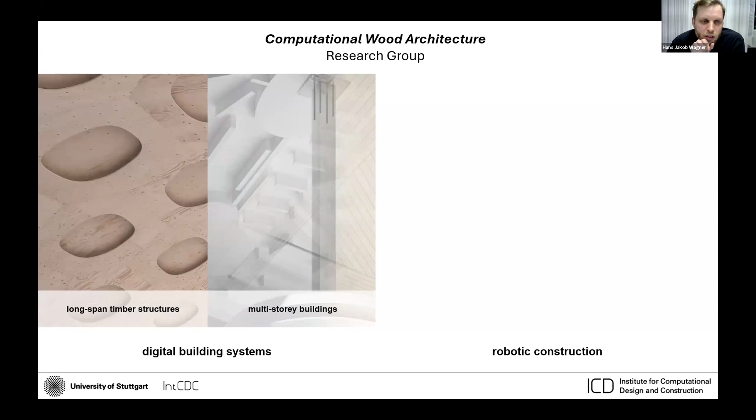So I'll speak about adaptive automation in computational wood architecture. And that is basically one of the core focus topics that we're trying to address in my research group, aptly called Computational Wood Architecture, with a small wink at Oliver. And what we focus on is the development and the conception of digital building systems. And at the same time, we try to integrate that with robotic construction processes. On the digital building system side, we've been focusing mostly on long-span timber structures, but since more than 5 years, we've been deeply invested in multi-story building systems. And on the robotic fabrication side, we've been doing mostly robotic prefabrication.

But since recently, we also have a big team together with our partner institutes here at the University of Stuttgart, where we develop novel robotic on-site construction processes. We do that all under the notion of co-design, where we try to integratively develop design and engineering methods together with fabrication and construction processes, and develop new building and material systems.

A fairly good example for that is the Buga Wood Pavilion that is depicted in these bubbles here, where we came up with a new building system. Actually, that was mostly still when Oliver was here, and then we developed a new fabrication process together with a new fabrication platform in that case. And I'll show quickly how that looked.

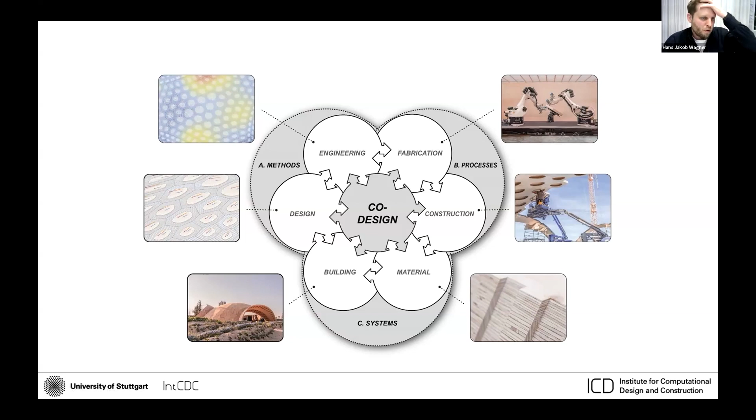Basically, we had a robotic fabrication cell that we transported to our partner at Müller-Blaustein Construction. And these two robots were basically taking directly the data from a computational design model to assemble 376 unique cassette building assemblies. And after fabricating those, this is the final result.

We were able to assemble them on site with basically zero tolerance, speaking to the high accuracy that we can achieve with robotic fabrication. And even though each of those building components has a unique shape, the robotic fabrication was fully automated.

And this is basically the starting point of what I wanted to present today, because these kinds of projects, the segmented timber shells, were really a great vehicle to communicate what is possible and what we can achieve, what kind of novel forms and novel design opportunities we can find in the combination of novel technologies of computational design coupled with robotic fabrication or digital fabrication for that matter.

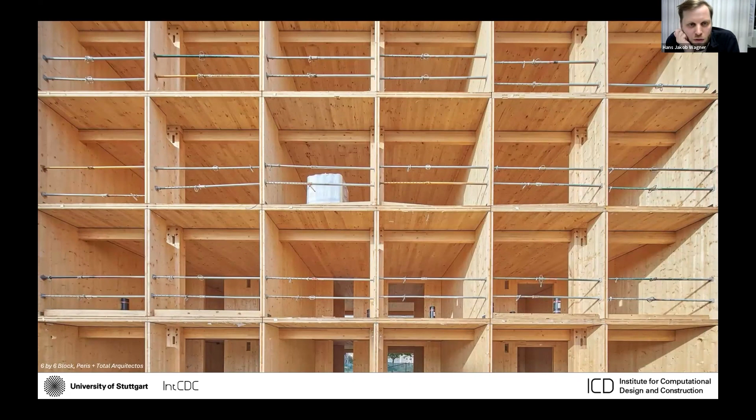But of course, we all know that not all buildings must be segmented timber shells. Some buildings are also multi-story structures. And after the Buga shell, we basically asked ourselves, okay, how can we apply those technologies and this fundamental method of co-design, of integrative development, to multi-story structures, and how can we overcome a certain kind of limitation that has been visible in construction since at least 100 years.

We've seen the systematic, functional and standardized prefabricated buildings from the 20th century, and our hypothesis or our research challenge is that even though today we speak about standardized and prefabricated construction with completely new terminology, we need to be very careful not to fall into the same kind of traps that have become apparent with the standardized systems of the 20th century.

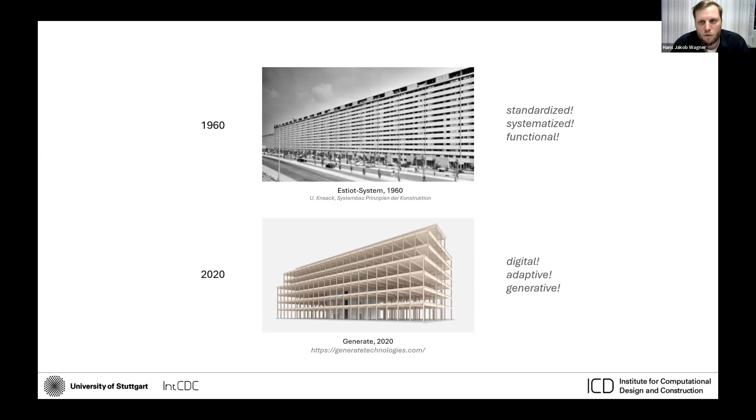I think Oliver's company is a really nice example of trying to overcome those kinds of constraints that lead to a fairly strict, non-adaptive and rigid kind of architecture. And in research, we're trying to power this movement of overcoming these restrictions. What that means is that we want to achieve in timber construction a similar kind of spatial experience that is possible with concrete slabs. Specifically, I'm talking about slabs.

For that, we need, of course, to transfer a unidirectional material that is timber, with its predominant fiber directionality and anisotropic material makeup. We need to achieve not only a bidirectional plate and slab structure, but a truly multidirectional slab structure. And that's really the challenge that we're trying to solve. It's a challenge not only of material buildup and cross-section, it's of course also a challenge of joints and connections.

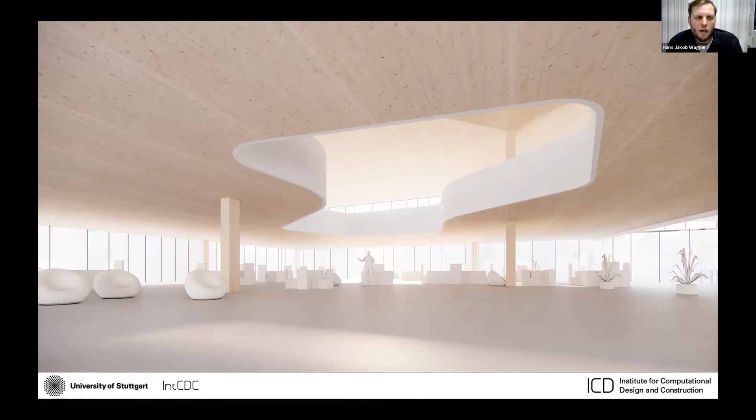But the overall goal is to achieve building spaces like you see here now on the screen. I guess far less exciting and crazy than some of the other projects that we're doing in ICD, but truly meaningful to me, because I really believe that if we enable in timber construction this kind of freedom of less rigid ordering systems, then they can also achieve a much higher market share.

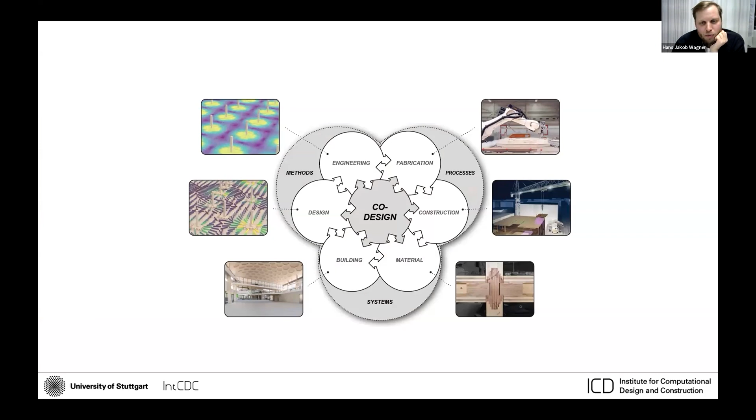We applied the same method as I mentioned before, called co-design, and we basically developed a fundamentally new building system from scratch. Actually, Oliver still had his fingers in that project as well. Gonna skip a slide quickly. So early 2018, 2017, I guess, there was already the first research project application with some ideas on how multi-story timber structures could evolve and how they could become more adaptive, more performative.

In 2019, I started working on that with the first prototypes, and since then we've been on a fairly amazing journey. We've worked together with fantastic engineers at the MPA here in Stuttgart, with fantastic building physicists, acoustic engineers, and of course our colleagues at the Institute for Structural Engineering at the ITKE with Professor Knippers.

And we've built prototypes together with Züblin, which is a large construction company here in Germany, and tested our robotic fabrication, and also did some first tests on the robotic on-site construction, where I can only show some very early hints on how that's gonna look.

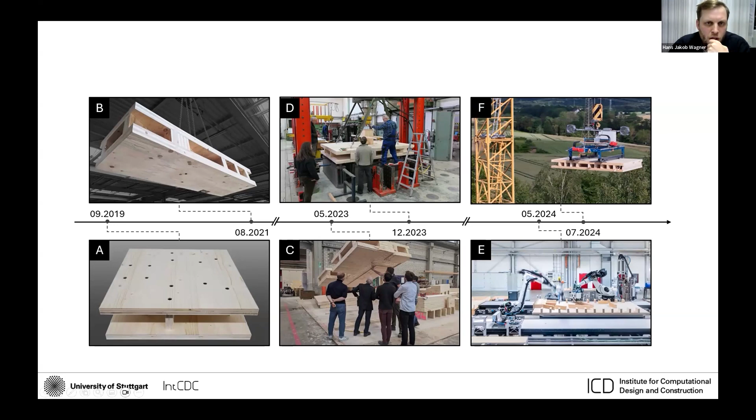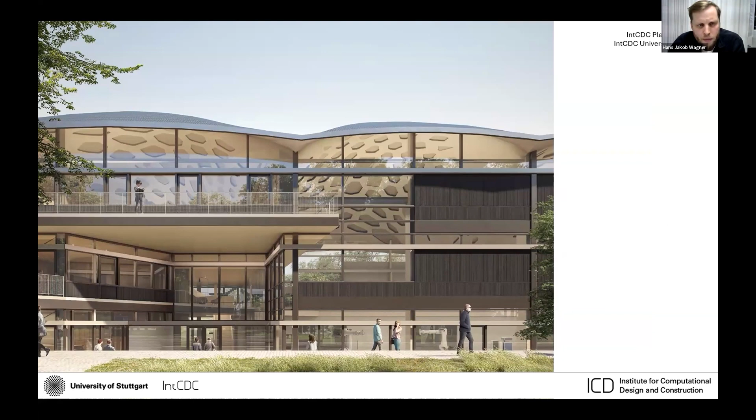And at the same time, we implemented this new system into the design of a new building that we're currently planning, which is the LCRL, or the IntCDC building. The IntCDC is the excellence cluster here at the University of Stuttgart, basically a large research center. And the building that we're envisioning will become the laboratory for that cluster.

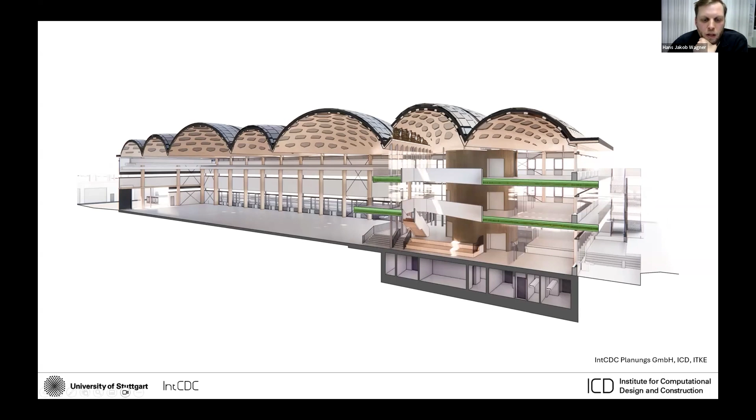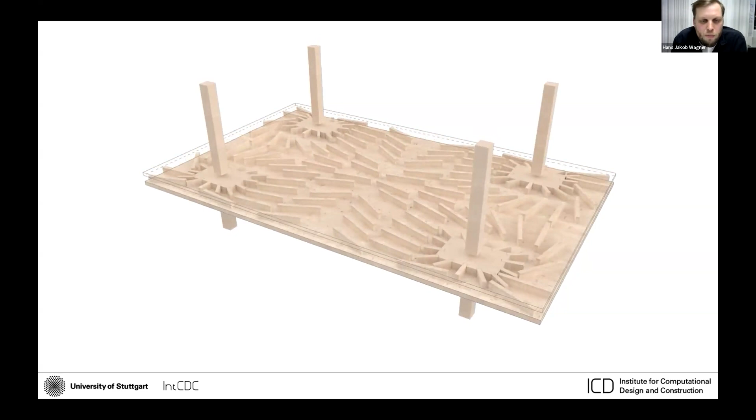And our multi-story timber slab structures are located here in the office area of that building. And I will quickly introduce you now to the concept of that building system. Basically, we start with a CLT slab, but we make it hollow. We split it into two plates, have a hollow core, and we couple that system with shear webs, and the system is point supported, so that those shear webs actually necessarily need to follow the force flow in the structure, and around the column we reinforce the slab with solid blocks.

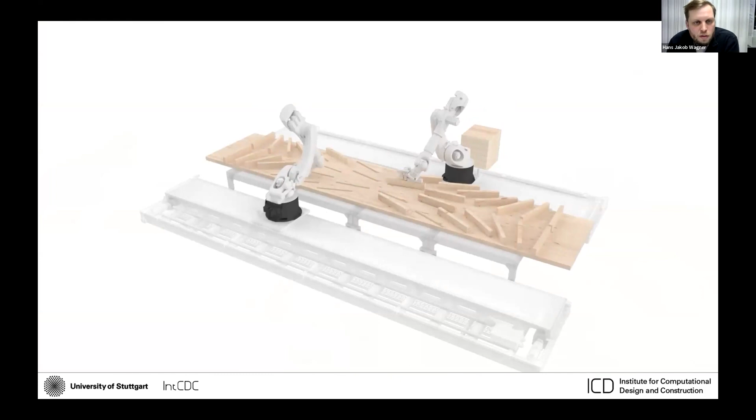We split the slab in segments that are fully robotically fabricated. We use a glued manufacturing process, so basically the elements are glued onto the bottom plate first, and then the top plate is glued onto those inner beams. Of course, the size of the segments needs to follow the fabrication space of the robotic fabrication setup, and then we have all those segments joined together to form a quasi-monolithic slab structure on site.

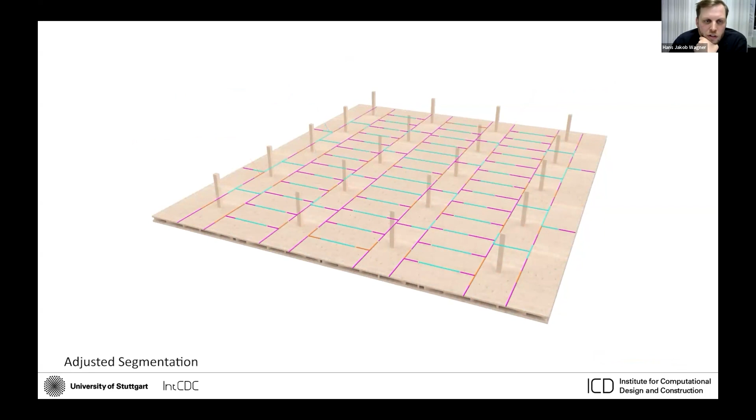Of course, there's different forces in different regions that not necessarily follow the same segmentation pattern that fits the structural logic, the fabrication logic. So we have actually a number of different kinds of joints that follow a different performance spectrum implemented in those structures. And really the core aim is that we allow complete flexibility to the architectural designer to put columns wherever they want in the building, and to then have the building not be dictated by the transportation limitations of certain segments and by the transportation logics of modular construction, but really the fabrication domain and the fabrication limitation at some point just disappears in a solid flat slab, independent of where the columns actually are positioned.

At the same time, that allows us to build highly adaptive buildings, which is specifically important in inner urban developments, where the sites sometimes have their own quirks and boundary constraints, and at the same time have also internal constraints that come from mixed use development. So maybe there should be a supermarket on the ground floors, then some offices in the first upper floors, and then some residential units on the top floor. Each of those systems have different requirements on column positioning and grids.

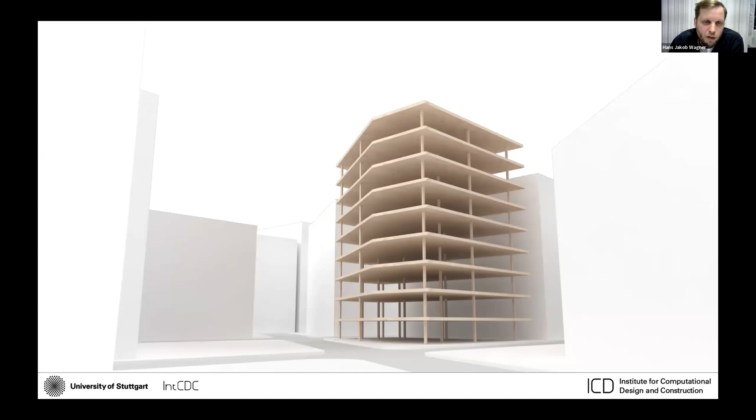So actually those buildings usually, if you build them from concrete, are done with fairly large spans, and of course are point supported, so that they can also be reused very adaptively. And we try to achieve the same thing with timber, and importantly without beams underneath, so that we can actually achieve very compact buildings, and we don't lose very valuable space inside inner urban developments. The building that we designed for the site here in Stuttgart tries to showcase all of those qualities.

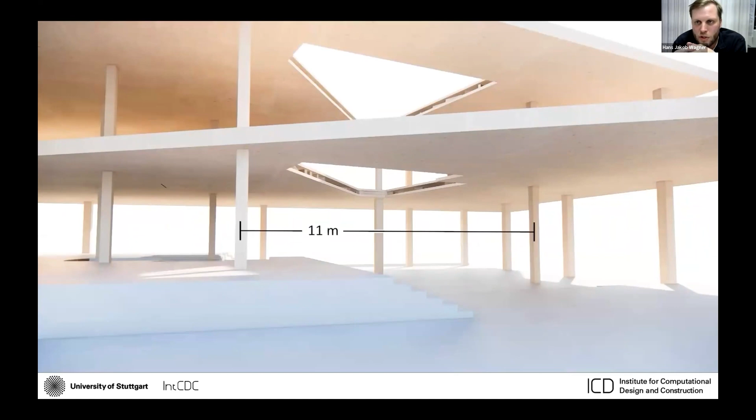So it has 11-meter spans. It has irregular column positions and a cutout for a central stair that connects together all of the office area. At the same time, we have a scissor movement of the two slabs to really connect the office space with the hall and create this bidirectional relationship between the researchers that are working on the computer and the researchers that are working in the hall with the robot.

Yeah, that's kind of where we are. We hope to finish that building fairly soon. We're currently waiting for the final signatures of the client. You can imagine it's a big project and quite exciting to us to start the fabrication together with Züblin Timber. I'm actually coming to the end of the presentation.

I just wanted to give a very short outlook to some new projects that are starting in parallel to the project that we just saw, which is a new slab system which completely breaks free from the logic of prefabricated CLT plates, but much rather we want to build here our segments starting from the lamella itself, following some of the insights that we gained with the hollow building system that I just showed. And this project is interesting, and I mention it also specifically because it's actually a transfer project funded by the European Innovation Council.

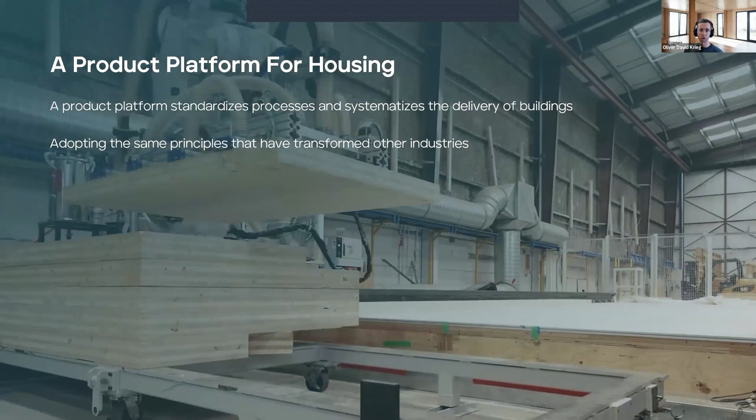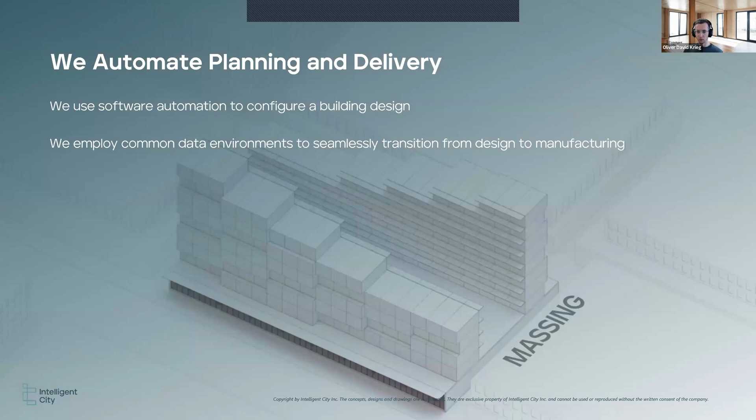That means we standardize processes, we systematize the delivery of buildings, but we adopt principles of mass customization through the power of technology by defining design ranges or design spaces of our building systems, and ultimately encoding them in our design systems, which we then can automate using software and basically connect the complete supply chain or value chain of building buildings from design to manufacturing and into construction.

So the idea of a product platform is obviously not a very new one, also not in construction. But maybe to make a point here as to why it may be so difficult to implement. A product platform is a set of common repeatable elements that can be shared across a range of related products. A really good example is the kitchen. A kitchen is actually an industry-wide product platform. Every kitchen supplier has agreed to adhere to certain constraints so that they're interchangeable.

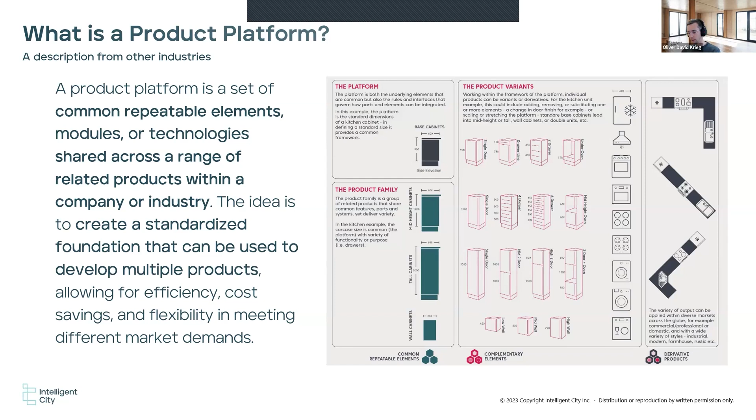And so basically everything is based on certain base cabinets and variations thereof. And there are standardized interfaces so that you can buy different fridges and stoves that can interface with your kitchen. So ultimately, each kitchen can be different, even though it is sharing common parts. Other great examples of product platforms are cars, obviously.

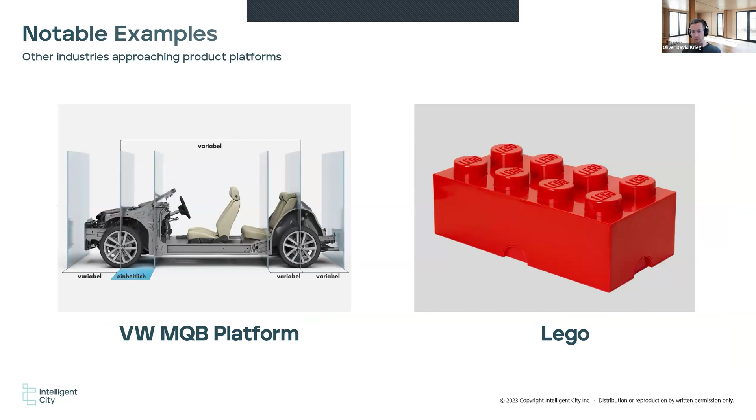Lego often comes up. I really like the tension when we compare with the car industry because there are so many good lessons we can learn from it, and yet there are so many things that are not applicable to construction. The number one thing being you cannot do this. You cannot vary the length and the width of your car because your garage is wider or longer and you want to utilize the space that you have in your garage, right?

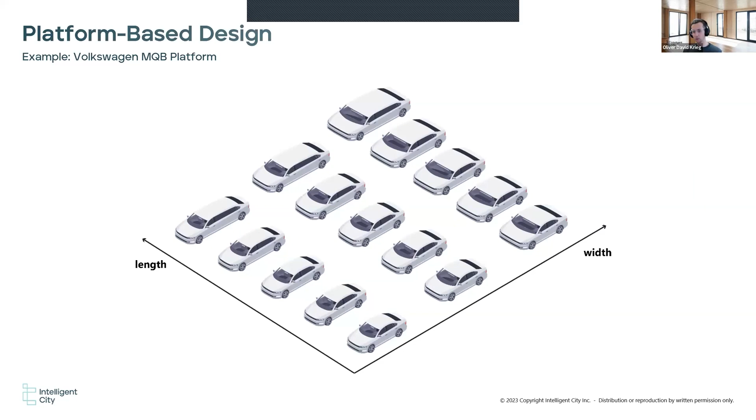That sounds maybe familiar for those of you who work in real estate development. If you have a lot that has a certain size, the building has to fit in the lot. And so what we encounter when we look at multifamily, especially multifamily construction, is that the configuration of the building is one aspect, but the other aspect is also what actually fits on the site. And so we have to combine the idea of a product platform, the idea of having core elements, complementary elements, with the idea of geometric adaptation or geometric customization so that the building fits onto the site.

So what we do at Intelligent City is we like to design the entire building, deliver the entire building as architects, in the future also including the engineering, although some of that is already in-house. We manufacture and are specifically focused on the core elements, which is the envelope and the structure of the building.

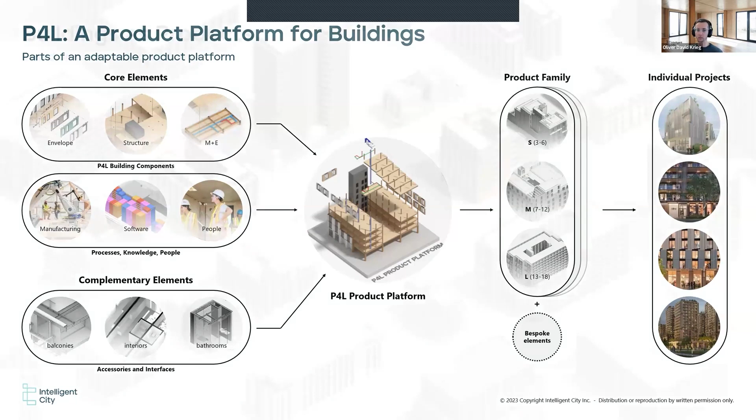And then we interface with complementary elements, and we are trying to build an ecosystem here with prefab bathrooms, interiors, balconies, and other parts that attach to the building, so that we end up with a product family that we usually divide up into low-rise, mid-rise, and high-rise construction. And from that, we can then deliver individual projects that can differ significantly in their shape, in their design, but they're still based on the same platform.

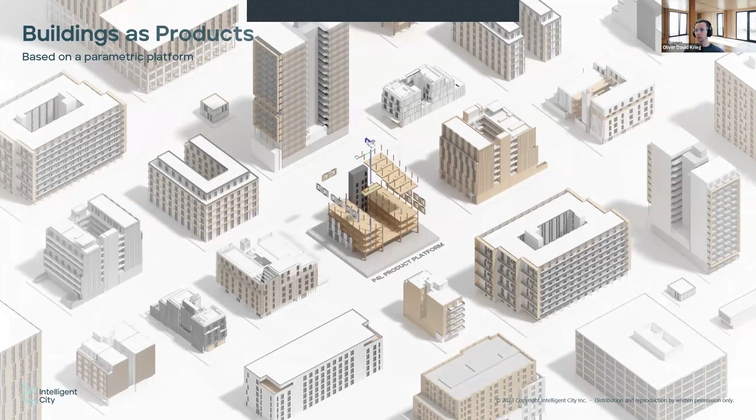So that's the ultimate goal of industrializing construction. And I'm sure we're not the only ones working on that. You develop a variable, configurable product platform from which you could deploy many different buildings. So ultimately, the design process of a building becomes a configuration process. You go from designing a project to configuring a product.

So you ultimately start with the massing, you put in the apartments, you have a few choices in terms of performance. There may be some choices for the structure, but then ultimately it's really down to facade. You can see windows, cladding, materials and colors, accessories, and the interiors. So the combination of the very first part and the last part is really what defines the aesthetic and the branding of a building. And these are the aspects that have to be really variable.

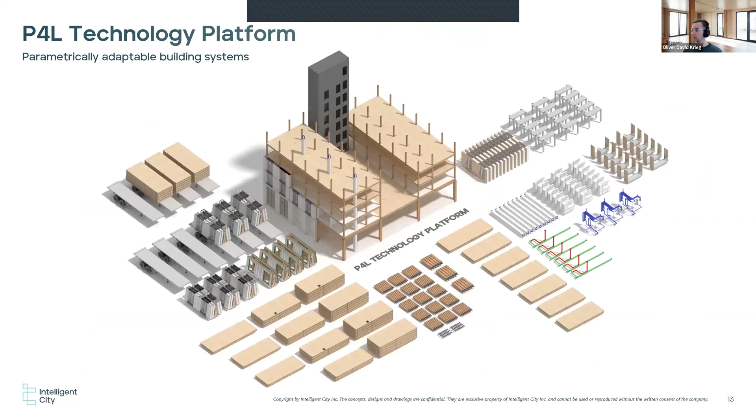And so for the last 6-7 years, we developed the technology suite in a way that would allow us eventually to design and deliver these buildings. It can be very easily divided up into 3 aspects that I want to talk about a little bit more in the next 10 minutes. The one part is the building systems essentially. So really the floors, the superstructure, including the columns, the envelope system, both of them mass timber based, both of them made for high rise, both of them certified for prefab and enclosed spaces.

We do have a portion of MEP integrated into those systems, but what isn't integrated is still planned within the system. So it's controlled by us. To deliver these, we had to develop manufacturing technologies, and we had to equip our own factory with tools that allow us to manufacture these components with a certain level of variability. So very similar to what Jakob just showed, the design to manufacturing process: what kind of components can you make, what are your limitations in terms of design space coming out of the machines that you're using, but also, of course, transport and cost and so on.

And ultimately, this is all controlled by a software stack that is really just plugins, tools that we develop ourselves in Rhino and in Revit that allow us to design a building, basically divided up also into 3 aspects here: Delta Studio to design the building, Delta Systems that populates the building parts into the building, and ultimately defines the BIM model if you want. It's a very enriched model.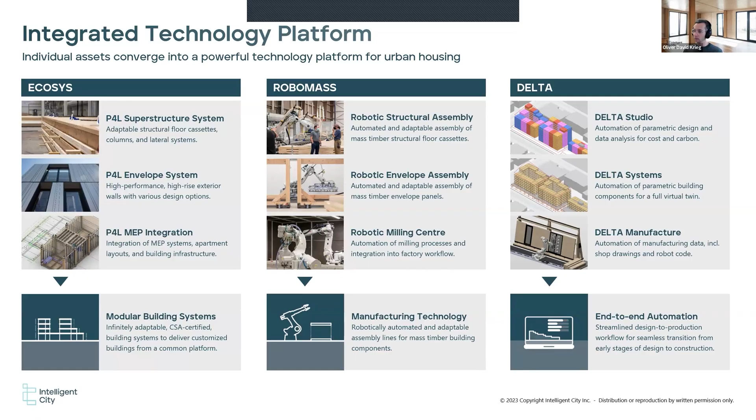In terms of building systems, it was really clear from the beginning that what is missing in this industry is an ecosystem of prefabricated components. Again, if you want to compare it to the car industry, there are many companies that prefab lights, seats, steering wheels, and so on. Same in other industries. You have suppliers and you have the OEMs.

What's missing in our industry is a big supply chain for mass timber prefabricated components. And so we decided, at least for those aspects, we have to develop our own systems and we have to ultimately manufacture them ourselves. Basically, if you look at our buildings, they are made from floor cassettes, columns, and envelope panels.

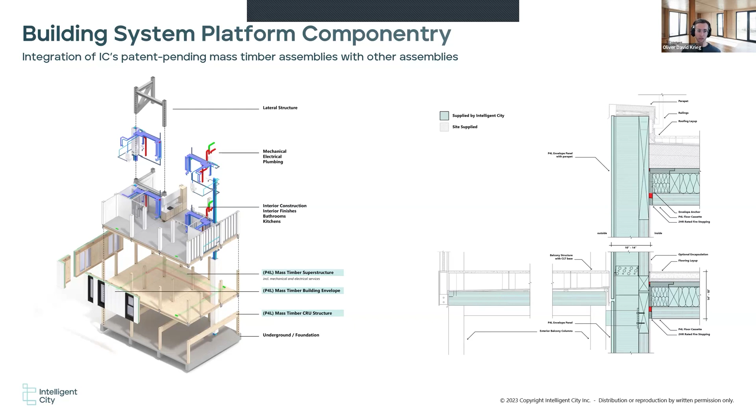Very interestingly, maybe this one first here, our floor cassettes are indeed cassettes. They are hollow core, two-way spanning stressed skin floor cassettes. Very similar to what Jakob just showed. They have an interstitial space where ribs transfer the shear forces, and they allow us to construct buildings without supporting beams. At the same time, they also allow us to implement services. I'll show that in a second.

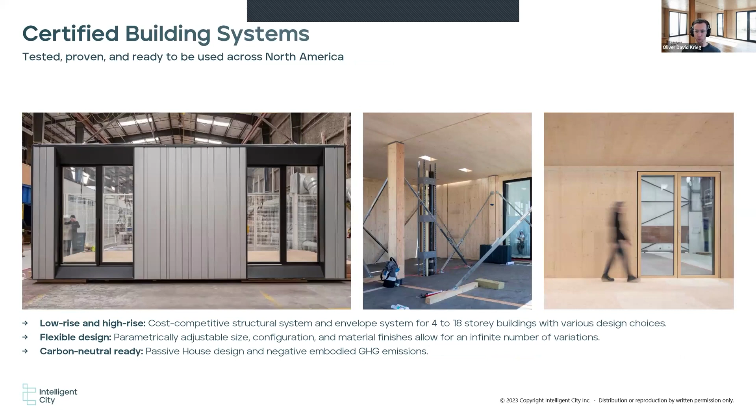The other part is a mass timber curtain wall envelope system that is applicable for high rise. So as far as we know, it's the first one of its kind. It is passive house certified, or can be passive house certified. It passed certification tests. And so that is sort of the first step.

How do you lay out the structure of the building? It comes with a lot of constraints. That is really clear, especially in housing. You really overlay the structure with the apartment layout. So the apartments also become part of our library because they really define how we subdivide the building into grids.

You really start with the layout, core placement, and follow, I would say, relatively rigorous rules, although in mass timber construction, generally, these rules are a bit more rigorous than in concrete, where you have pretty much complete freedom. And that is also something that our industry is learning, that if you work with mass timber, if you work with systems built, you are a little bit more constrained in your design freedom. You cannot go completely crazy with your corridors and apartment layouts.

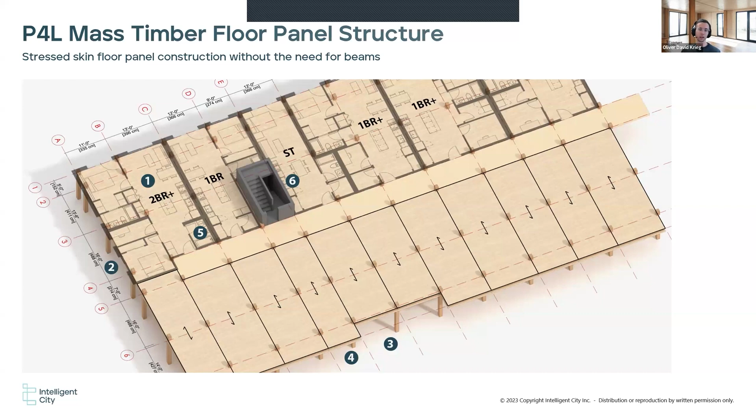But in turn, you get a system that is already resolved. In turn, you get a de-risked and accelerated project. So the value creation here is that you know what you're getting as a developer, and you know what it's going to cost, and it's not going to be an explorative process as traditional construction may be.

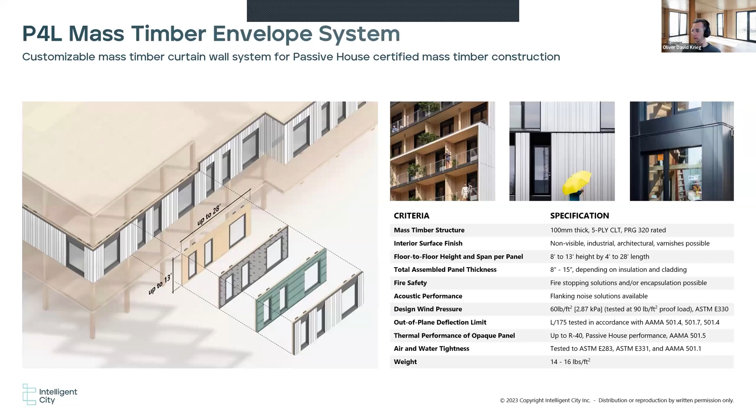Similarly, for the envelope system, it wraps around the building. It encounters all sorts of edge cases, such as corners, setbacks, balconies, terraces, parapets, and a combination of all of them. Again, it is a mass timber curtain wall system, so it's hanging from the structure, and it is approved for up to 18 stories in the construction.

And this is a bit of a, on the one hand, you get to understand how the system works. On the other hand, this is also the logic of our algorithms in the background, how they subdivide the envelope to enable us to put these panels in place. They're up to 2 grid spaces in size, so up to 28 feet. At that point, they do weigh around 5,000 pounds.

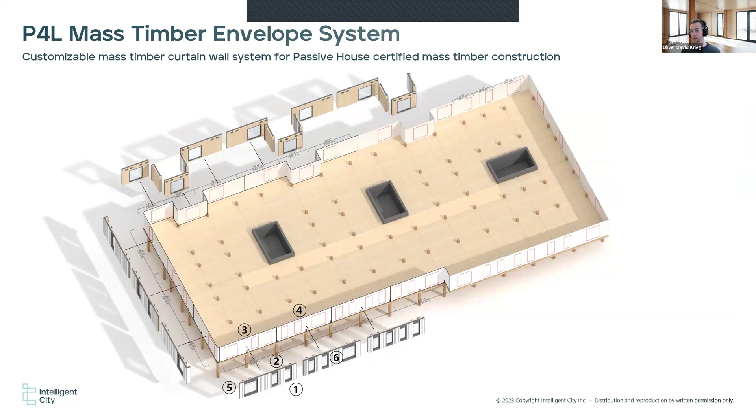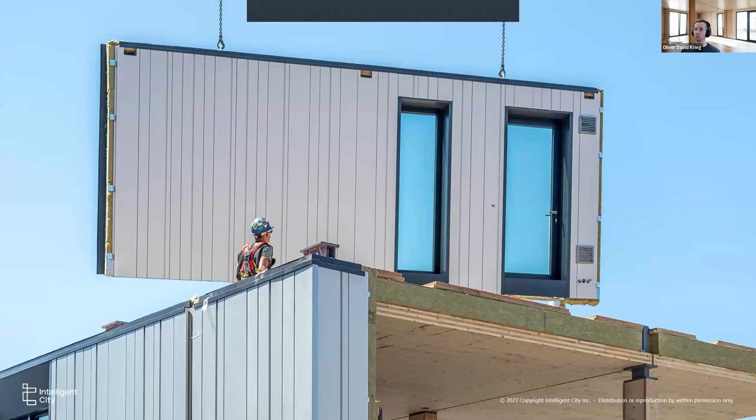So this has some significant implications also on on-site construction, what kind of crane you need to choose, and so on. We did test them twice actually already for passive house and seismic and all of these things, as we did test the floor cassettes for fire safety and structure and diaphragm performance.

So a bit of a time frame here: between 2019 and 2021 was early development. That's where we raised a seed round. In 2022, we got a factory space and put in some of our robot cells that we developed to kind of lay out the factory and the workflow of the factory to produce floor cassettes and envelope panels.

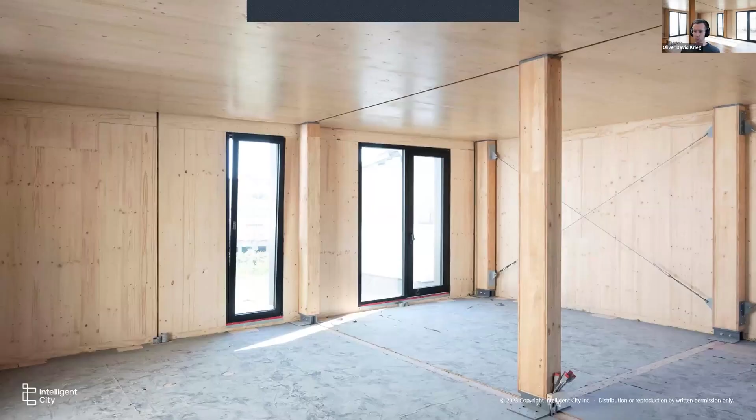And then throughout 2022, 2023, while we commissioned that and experimented with that, we got into our first project. This is a small 25 by 25 foot mock-up that we basically used as sort of the last chance to test everything, how everything comes together.

And from there, we learned obviously a ton again of how these components come together on site. To give you some metrics, the goal is at least 7 panels produced per week. That's 7 envelope panels and 7 floor cassettes. And the goal is also to install them every half hour to an hour, so that in a medium-sized building, you can install a floor in 1 or 2 days. And we've actually hit that recently in our current project that I'll show some pictures and videos of later.

It's really down to the really small details of how these things come together on site, especially when you're up in the air on the 6th floor with a huge crane and it's a bit windy and rainy. That's when you can truly test if your ideas have worked.

The manufacturing concept here is we automate those things that are difficult to handle as manual labor, but also those things that are repetitive, that need precision, and that need variation. So variability between parts is fine as long as people understand what to do, or as long as the robot knows what to do. So if every part that you encounter is different, but the manufacturing logic is the same, that's when customization becomes useful. And so we decided to implement robotics to assemble the components. We pick and place, we glue and screw. We also have our own robotic milling center.

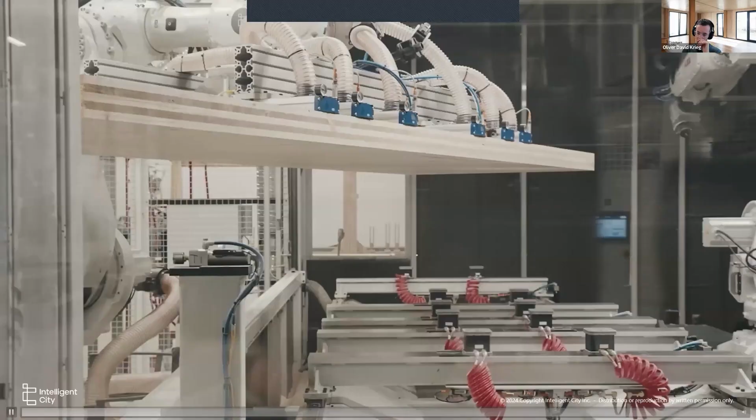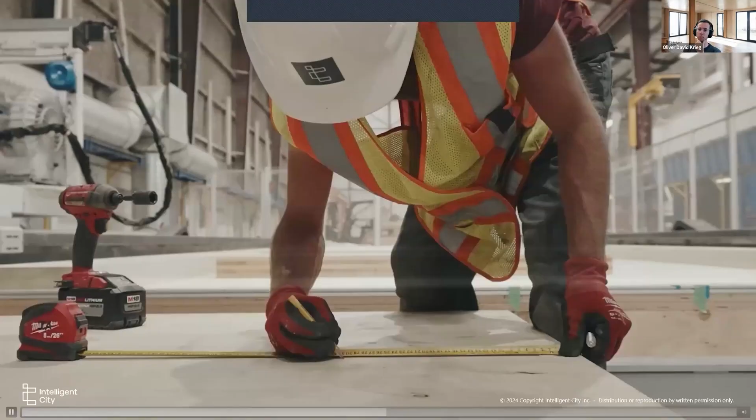Let me see if I have some images here. So that has a little more automation than your traditional milling center, so that it's loading and unloading materials by itself. So we can ultimately implement it with AMRs, just as the one you saw in Jakob's presentation, so that the materials can be brought around the factory automatically.

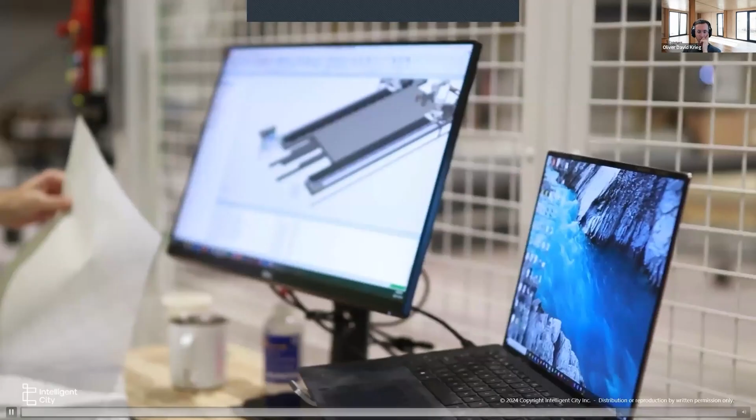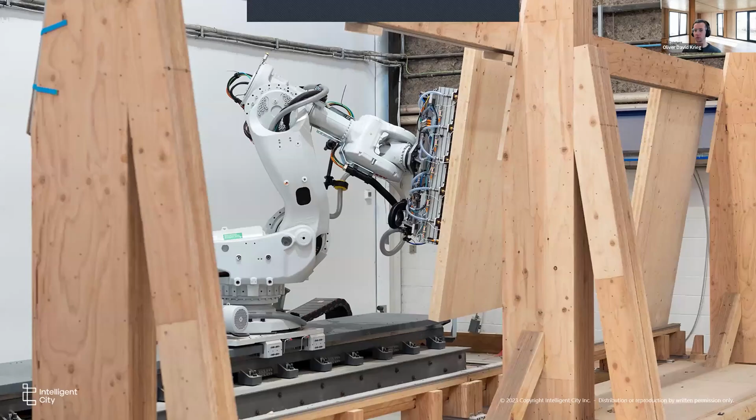And then the same thing with the floor cassette assembly. I'm not really showing a lot here because it's a very complex and sensitive process. But as you have seen before in the pictures, the floor cassettes glue together from various smaller components so that they form one consistent panel. Now that's all controlled through a software workflow.

Okay, I'm gonna finish up here in a second. So as I mentioned before, we structure it in 3 phases. You go from the design intent to a BIM manufacturing model and ultimately to manufacturing data. I think this is probably the most important slide for this kind of idea.

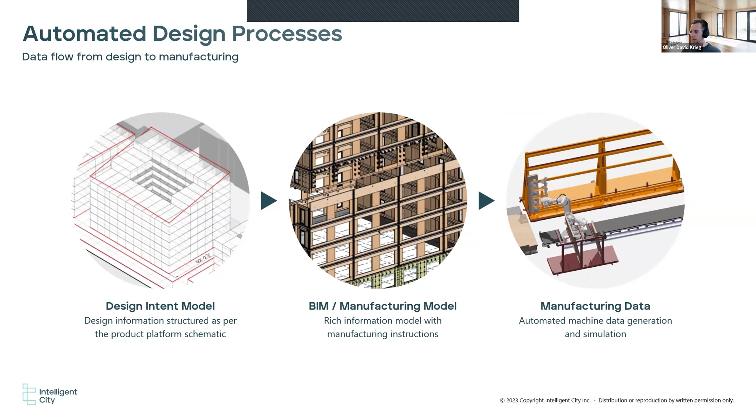This is enabled by having a common data environment, so that all the objects that are generated in the first picture can be referenced to generate the parts that you see in the second picture, and those again can be referenced and manually edited or automated, depending on your workflow, to then be referenced again for the manufacturing information. And that allows us to basically create fabrication drawings, robot code, and so on, such as for the assembly of our floor cassettes, as shown here in the simulation, and ultimately for other parts.

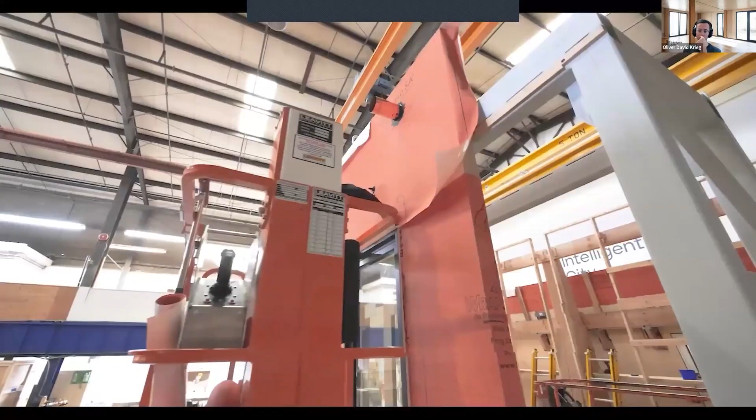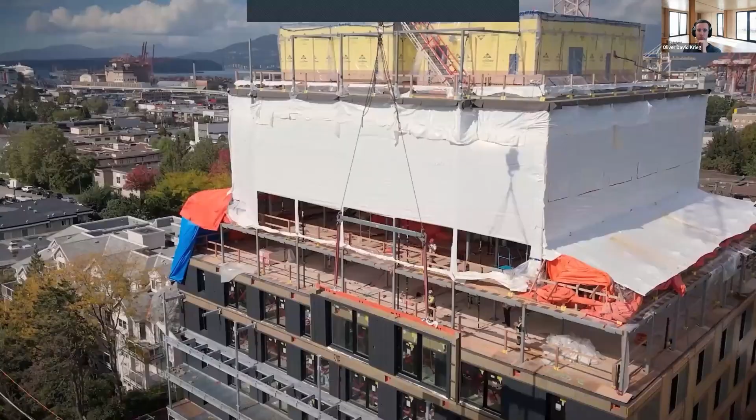So we can see here we assemble the envelope panel with a robot, or at least the timber portion. A lot is still manual, of course, especially membraning and cladding install and so on. Although this is all up for grabs, we want to automate a lot more in the future. What you've seen here is a few months old.

So we are just finishing up our first project. It is a bit more custom than what we would have liked, but it is actually a really beautiful cladding design with this sort of weave. You'll see a lot more of that around the building once the balconies and the screens are also completed. This is a 50-unit affordable housing project for BC Indigenous Housing Society here in Vancouver, BC.

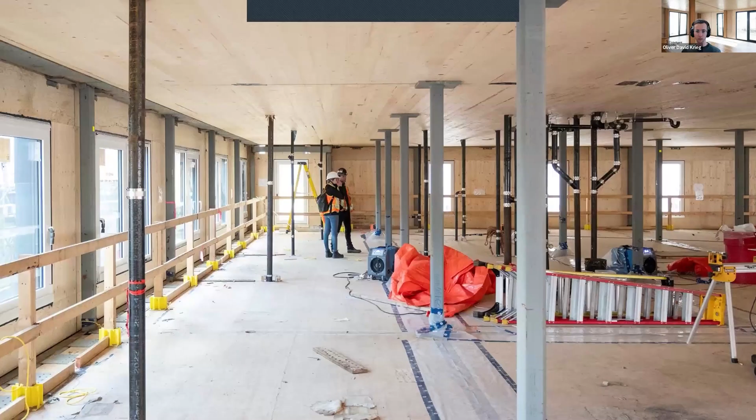And it has a different structural system. We unfortunately came too late for this project, but we were able to provide the envelope, which really kickstarted our own commercialized production process in our factory. And as we are finishing this project, we're now preparing the one in the middle here. It's a 9-story building that's completely Intelligent City system that's going to go into production in December, and you will see it on site probably in April or May next year. So that's our second step.

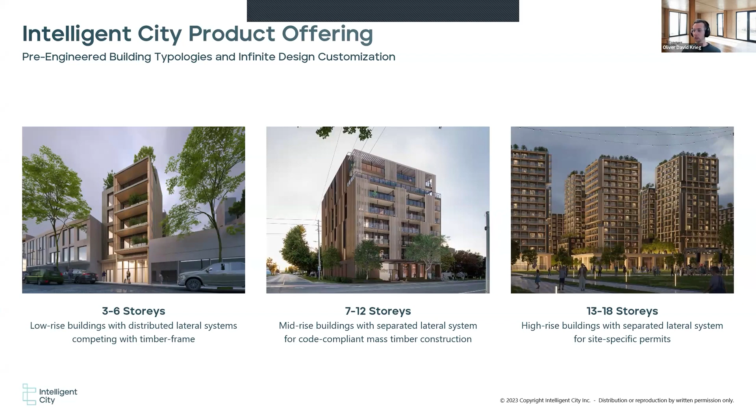And with that, we are looking to expand. We actually see a lot of demand for repetitive housing that is really sort of the ideal candidate, especially in the 7 to 12-story range in Toronto and generally the East Coast. And so we are currently planning to expand. Our current factory is really a very small plant. You would be surprised. It's just 15,000 square feet.

It has a certain output capacity. We can do about 200 apartments a year. But what we're looking for is basically a sort of 5-fold increase, a 75 to 100,000 square foot facility space, in which we then can produce between 1,000 and 1,500 apartments a year, both in BC and in Ontario, and then also in the US, depending on the demand.

The really amazing thing is that mass timber really started a sort of alignment process in the building codes because of the adoption of the international building codes. And so there are a lot of similarities between building codes throughout North America, with only minor differences that don't really affect our components as much as they simply affect the design of buildings and the setbacks and the apartment layouts.

So that's where we are. I'll leave it at that. There's probably a lot more to discuss, but that gives you an overview of all the technologies that we have implemented so far and where we are as a company.

Okay, thanks a lot also, Oliver. That was a really fantastic presentation, and it's amazing to see these things going out into the wild successfully. And yeah, we hope that we are also sending some across the border.

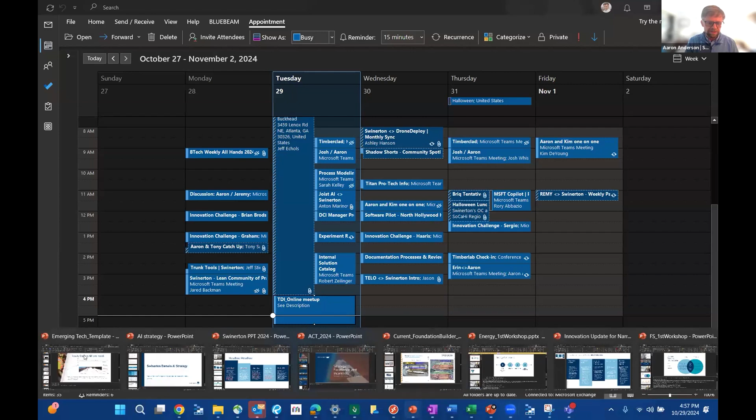So don't look at my calendar. No, I'm just kidding. You can see my calendar, but it's too full.

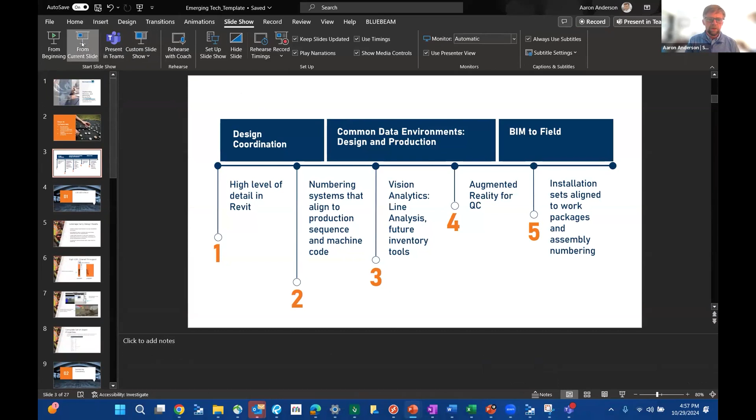So what I really want to talk about today is, I'll hit on a few key things here, but really for us, it's about finding what the most important parts are in the process to be able to layer in automation, to layer in robotics. And what we found is that waiting for detail is really the wrong answer. We try to get as much detail as early as possible into the process, and encourage people to get pencils down as fast as possible.

So we create a really high level of detail in Revit. We get to 450 LOD in Revit. We use numbering systems that make sense to folks, so we start numbering assemblies early. We get as much BIM information into those individual objects as possible, so that what we're doing is creating information that can be used throughout the process.

In our actual production facilities, some of the things we've really been focusing on are ways to use computer vision analytics. Instead of using them in the robotics, we're using them to monitor the way that humans are interacting with our CNC machines. And we've also been verticalizing in that space. So we now have traditional CLT manufacturing and traditional glulam manufacturing. Having access to those facilities is giving us supply chain access and the opportunity to innovate in the supply chain.

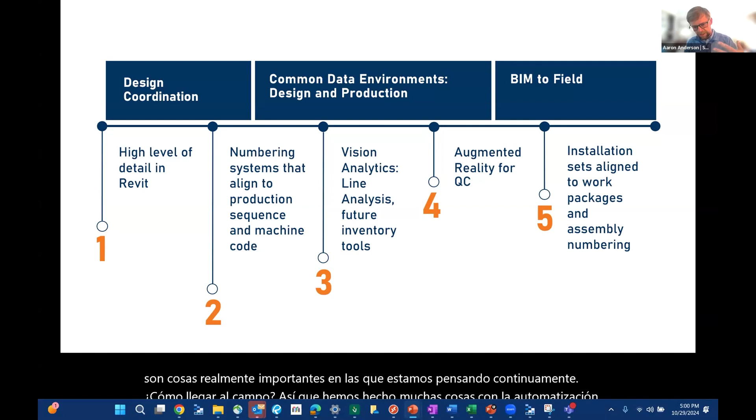So these work packages that we develop, this level of detail, all those things are things that are really important that we're continually thinking about how to get to the field. So we've done a lot of stuff with automating drawing production so that those things always have the same kinds of standards in them. They always have the information that's needed, and then getting the feedback from the field.

So, early design assets with information really helps us to apply analytics early, extract information at different stages of the process, and then also more rapidly iterate for cost. When we get these Revit models connected to cost and schedule, we can rapidly iterate and see what the effect is going to be on the schedule. We never get more time and we never get more money when we get these prices up front.

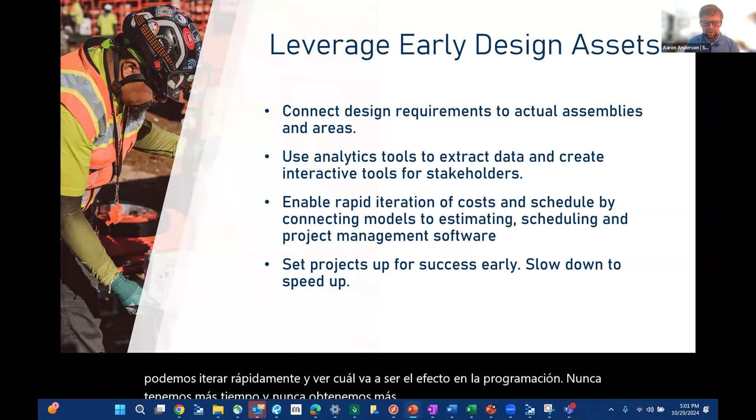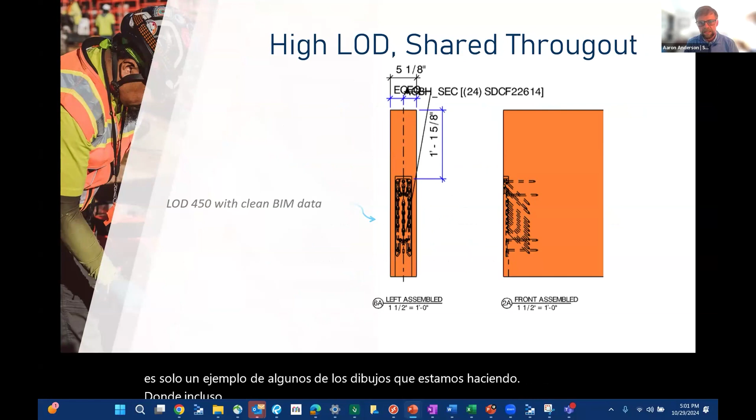But by coming up with the detail early, so this is just an example of some of the drawing that we're doing, where we're even including screws, things like that early on in the LOD, and then also getting a lot of important information actually into the model. We think that the biggest reason why BIM has failed us in the past is because we're not actually getting the information in there. It's not coming in early.

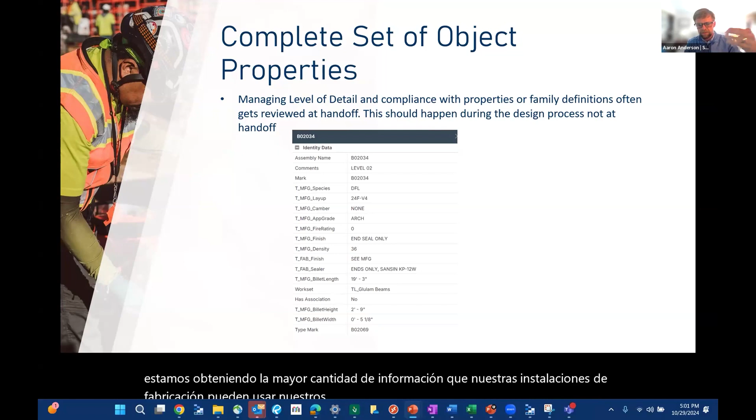And so we're getting as much information that our fabrication facilities can use, our products, our ordering processes, all that, and we're keeping that as organized as early as possible. One of the big things that we never learned in construction is that the reason why digital systems really work is that they rely on unique IDs. And so we're going back to that as much as possible, where by getting assembly numbering done properly early, we're hoping that we even continue to connect those things into design intent and other aspects of the process.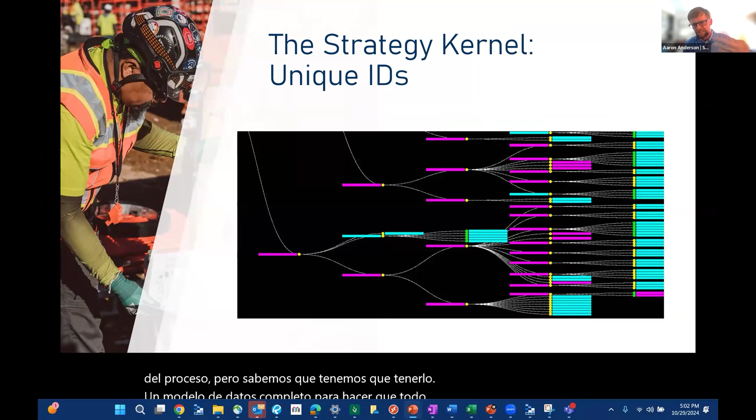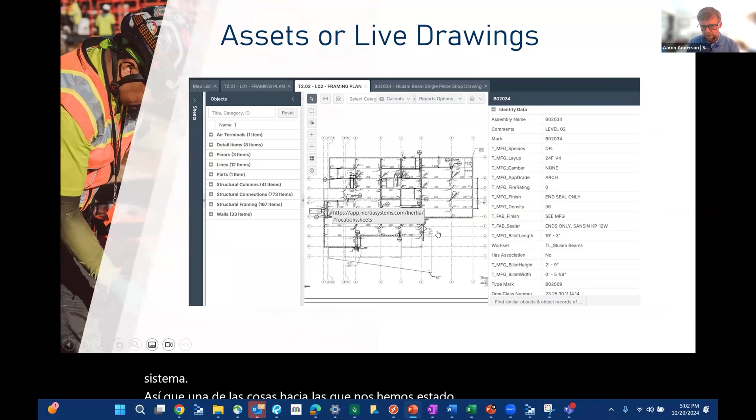But we know that we have to have a comprehensive data model to make all this stuff work properly, and remove risk from the system and be able to systematically remove waste from the system. So, one of the things that we've been moving toward is finding ways to make our drawings live. The idea that we're using drawings is a little bit ridiculous, but the reality is that the regulatory agencies, all these people still want drawings from us. And so some of the tools that we've been moving toward are really connecting those BIM models to drawing scenarios so that the two are lined up.

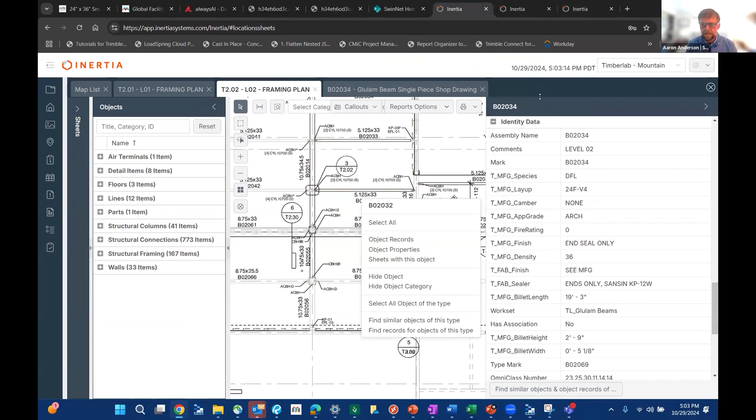We've found tools that allow us to not only connect the design to the field, but then also actually start attaching things like inspections, and all of these things specifically to these objects. So today we can go into the field, we can select a bunch of these objects, we can do quality control forms, we can do all these things and tie them directly to objects instead of tying them to sheets or to areas and things like that.

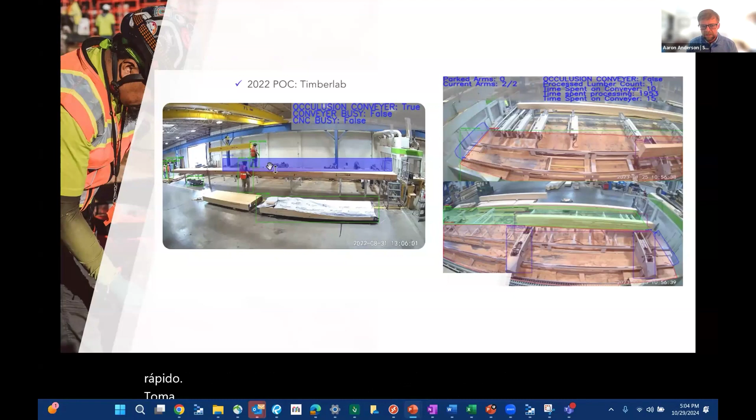So that way we're able to much more quickly take certain types of beams and certain types of hangers and things like that, and already have the code written for them. It lets us scale up a lot faster. But then we've got this issue where we've got people and these machines working together. And so what we started doing is really measuring these processes with computer vision by creating zones, setting up these objects, and just doing some simple things like time stamping them.

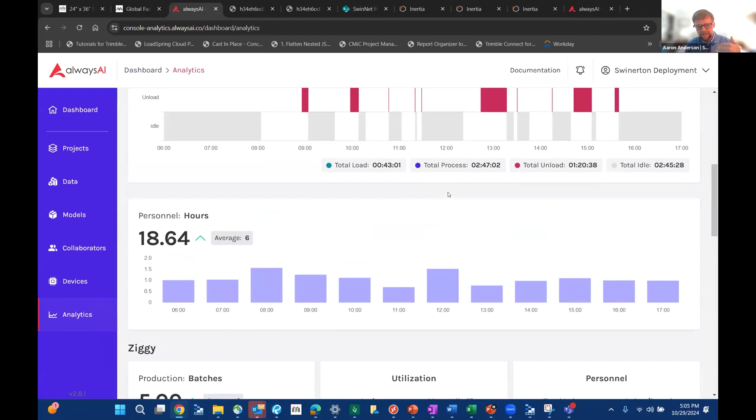What the time stamping has allowed us to do is to dig really deep into our process. And so we can see specifically how our load times versus our process times versus our unload times are on the table. Instead of measuring that we had 12 pieces move through the process in a day, we can actually see specifically how much time it took for each of those processes. And when you're working with people, what's important is also correlating the time spent in these places. A lot of times it's really underestimated the time we spend troubleshooting these machines or standing around them talking about it.

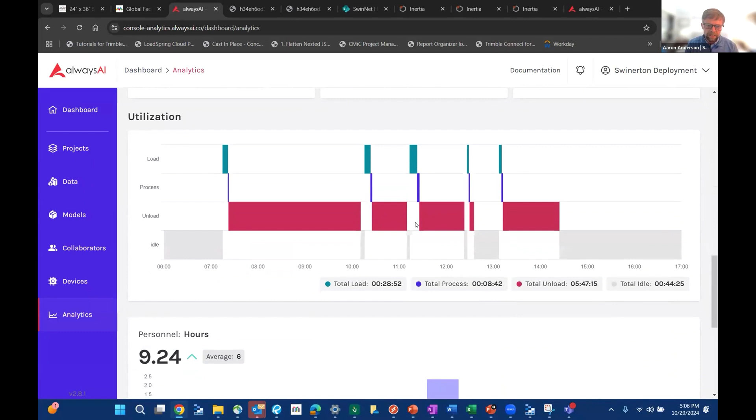And so what we're able to do is actually correlate directly the people that are involved in an area, working, running, moving drawings, loading, unloading, to the individual objects themselves. And we can start to get down to some serious production understanding. Like, here's a perfect example. Basically these pieces are sitting on the unloading table all day. There's probably some other reasons why this is happening.

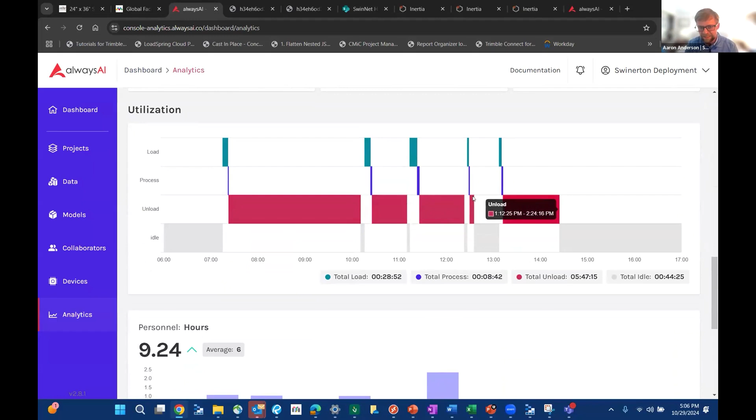But what you can see is instead of 5 pieces moving through this day, your actual process time on these machines was very small compared to the times that these things were sitting there. And so when you talk about simulating for maximum throughput, you can really go back to these core numbers about processing and then identify ways to parallelize or move the load and unload activities, maybe quality control activities, off of the machines and into places that allow you to get higher throughput. It really helps us to understand production better.

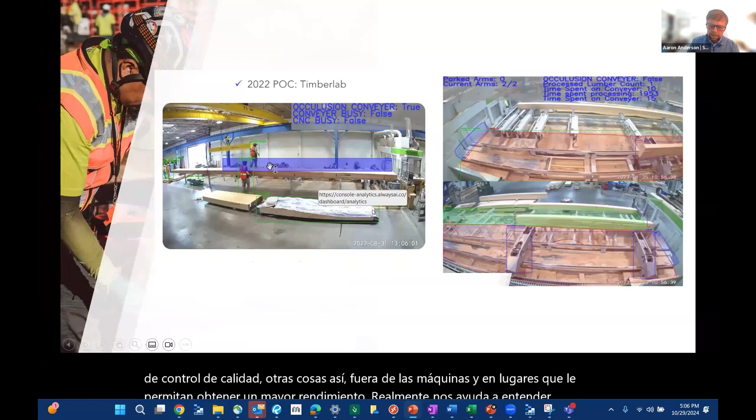All right. And then some of the other things that we're bringing in are laser scanning with the drawings. A lot of times we end up pouring decks in order to get sound and sometimes even diaphragm on the buildings, especially in the Northwest and in California, as we're still required to do gypcrete decks. We've been able to use laser scanning and some other computer vision processes to automate those pre-pour checks so we can make sure that stuff is in exactly the right locations before we go ahead and pour.

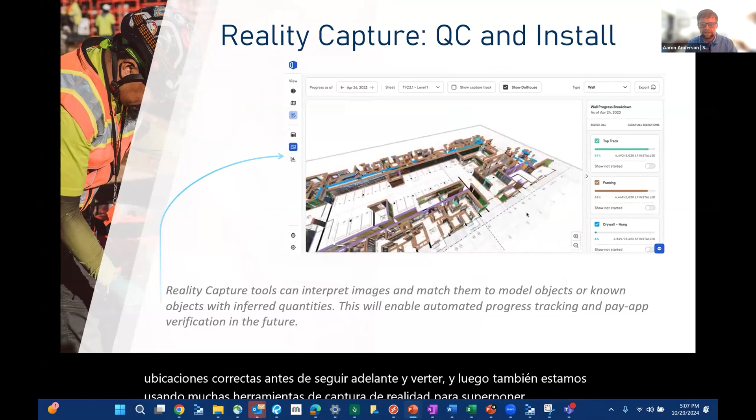And then we're also using a lot of reality capture tools to overlay what should be and what actually ends up happening. Those processes together, getting those things aligned, allow us to simulate and get insights from our scale. The other thing that we're relying on is also looking at layout in these spaces. So having that high level of detail in those drawings gives us opportunity to do things like

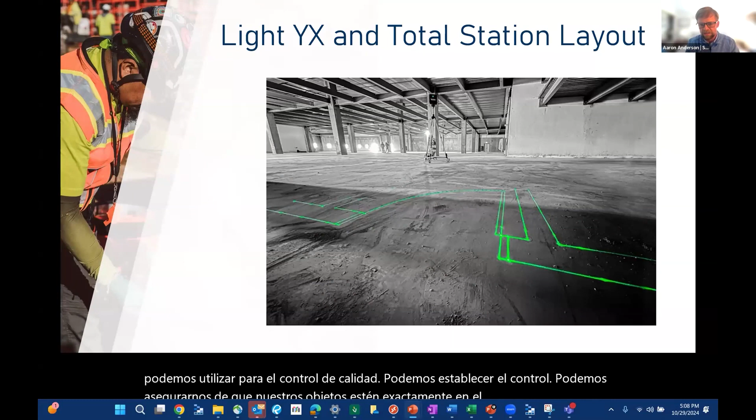using spinning layout lasers. So this is an example of a tool that we can use for quality control. We can set control. We can make sure that our objects are in precisely the right locations, but also that we can lay out walls, lay out plumbing, lay out other assemblies on site.

And then we're also doing a lot of robotic printing. Right now up in Vancouver, we're printing on decks all the layout for all the electrical locations, all the layout for any other installations that have to occur on the decks. And then we're doing our gypcrete, and then we're laying out on the gypcrete for walls and the rest of the construction there.

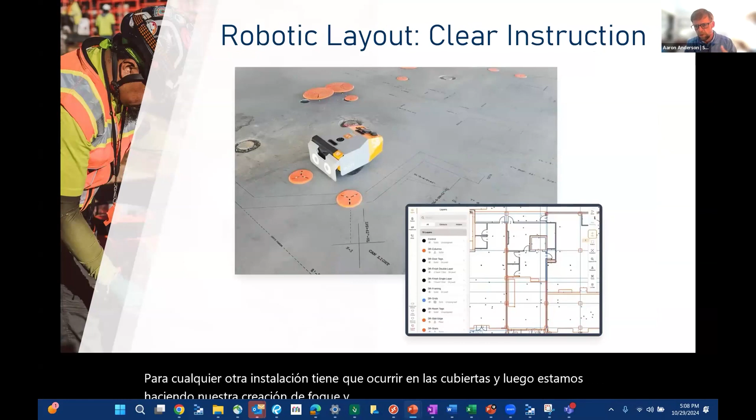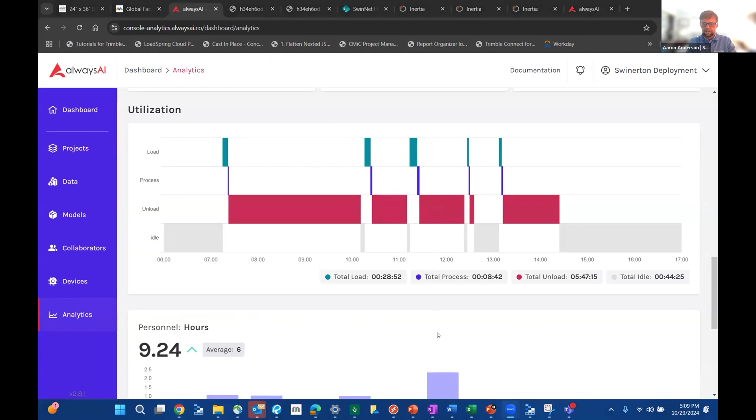So, yeah, I'm going to actually go ahead. I know that we're a little bit short with time today. Did I just end the share? Still see your dashboard. Oh, you do? You still see my dashboard? Okay. My little control panel says that I'm not sharing, but I'll go ahead and hit the button again and try to stop. And then you'll see my smiling face. Oh, yes. Okay.

All right. I could go into a few of those pieces a little bit more, Dylan, but the biggest thing for us is that robotics does represent an opportunity for more customization. We're finding right now that the biggest challenge for us in mass timber is building a mass acceptance of the product, and getting the supply chain working for traditional CLT and traditional glulam construction. And so we're really trying to make that more efficient.

But at the same time, we're seeing tons of opportunities to increase the level of customization in that mass production with the use of robotics. Obviously, the CNC machine doesn't move up and down the floor, and it requires 200 or more feet of floor in our plant. And if we could replace that with sliding robots or other tools like that, we're happy to do that and ready for that. We just also need the market to travel with us.

Great, thanks a lot, Aaron. It's also really interesting to see a completely academic-free approach to problem solving, but also potentially more sophisticated in some of the algorithms maybe. But I think we've seen a really great range, and it's fantastic to see that a lot of this is starting to get applied, and that it is really moving into industry. I think if we had this conversation even 2 or 3 years ago, it probably would have been a bit different. So I have a couple of questions that I can maybe start off with.